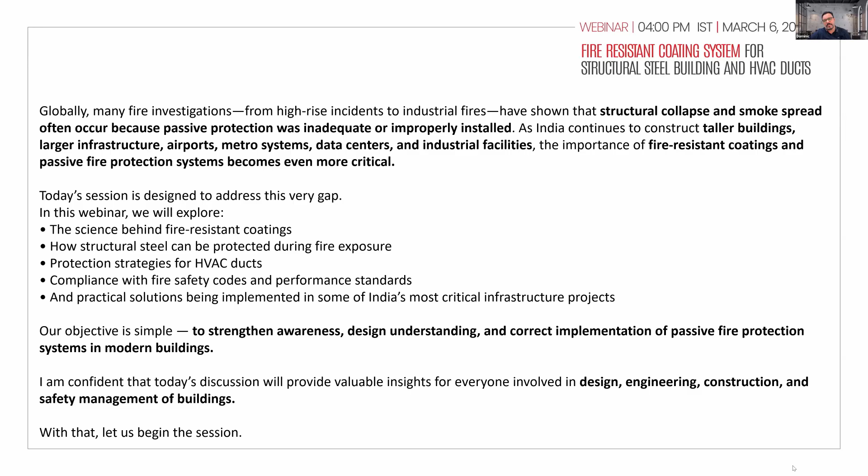And myself, Dominic - I'm founder of FSA, Fire and Security Association of India, Focus, Forum of Construction Utility Services, NFE. Today we are celebrating the 3rd year birthday of NFE, National Federation for Electrical Safety, and the one which is coming, a big moment in India, Council of Fire and Life Safety Professionals, CFLS. This is the association going to change the landscape of our safety professionals.

So I'm so proud that, being the architect of many of these associations. And as I keep saying, knowledge is not to keep forever, knowledge is to spread. Unless you give back to society, the purpose of life is wasted. So I have the young and the future.

of fire protection is Aditya Sibbal, a young man. Aditya leads an institutional partnership with Ameetuff, a brand with over 35 years of expertise. Ameetuff is well-known - I don't need to talk more about it - and they're protecting almost all the critical infrastructure. Look at the new parliament, new secretariat, prime minister's office, Supreme Court, Bangalore Airport. Name the important tunnels, metros, DMRC Delhi Metro Rail - most of these structures are all protected by Ameetuff. So I'm happy that today Ameetuff is taking up and presenting.

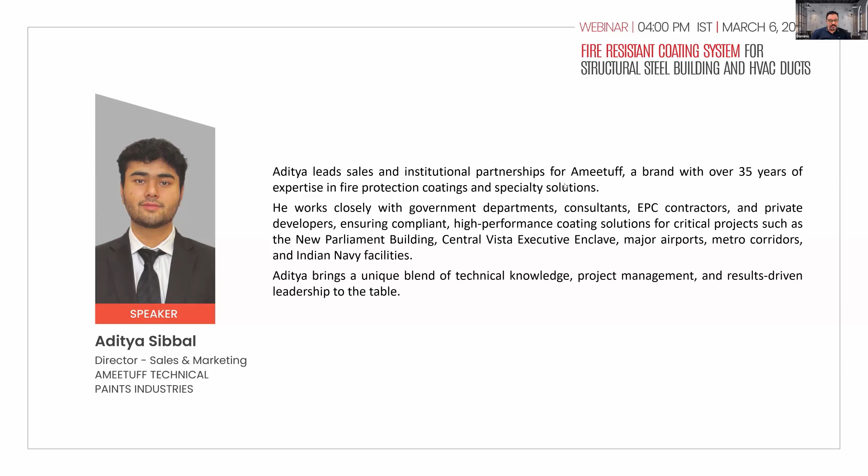Aditya Sibbal is going to do the presentation today. So I'm going to unshare this now, and I'm going to call Aditya - this is our second time doing a webinar with you, Aditya. Last time we had a very interesting conversation with people, and you are becoming a well-known face now in fire-resistant coating. I'm sure as days and months go by, Aditya is like Sachin Tendulkar in fire coating. So I welcome you, and I also welcome Senior Sibbal watching silently from behind the screen. I'm sure he will come during the question answer. Over to you, Aditya, welcome back.

Thank you so much for the kind introduction, sir. So, today's objective is really simple - it's about creating awareness about fire-resistant coatings for structural steel and HVAC ducts, because people think it's just about compliance, but it's really much more than that. I'm very recent in this field, maybe 2 years, but I've learned a lot by meeting you, by meeting various people, and also talking with my father. It's really crucial that we put the right amount of coating, the right type of coating, to the right type of surface. So for that only, we are here to present. I made a PPT for this webinar, so I'll just share that.

Okay, go ahead. Is it visible, sir? Not yet. Yeah, now it's okay, you can go full screen. Second.

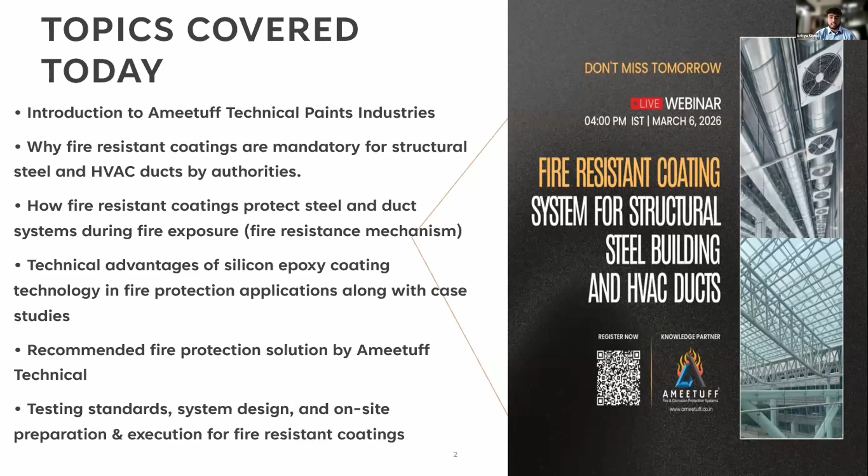The topics today will cover the introduction about the company, why fire resistant coatings are mandatory for structural steel and HVAC ducts by authorities such as NBC and NFPA, how fire resistant coatings actually work to protect steel and duct systems during exposure, the technical advantages of new types of coatings such as silicone epoxy coating in fire protection applications, along with case studies to support the claims, and the recommended fire protection solution by us that we believe is best and have successfully executed in multiple projects. Lastly, the testing standards, system design, and on-site preparations for all consultants to note down.

About Ameetuff Technical: we are a 36-year-old manufacturer of a wide range of fire resistant and fire retardant coatings for multiple substrates, including structural steel, ducts, cables, wood, fabric, other coatings, specialized dielectric, RFID shielding, marine paints, anti-fouling, and many more. That gives us deeper knowledge about the surface or application process across all sectors.

We have a dedicated R&D formulation team operating in two different centers, where we do not simply follow global formulations but engineer technologies suited for real project conditions in India, since we believe India's environment is different from foreign environments and coating durability should be higher.

We are trusted in critical infrastructure projects such as the new Parliament building, Palam Airport, Central Vista, Central Secretariat buildings, and airports like Prayagraj Airport and Guwahati Airport, all done by us.

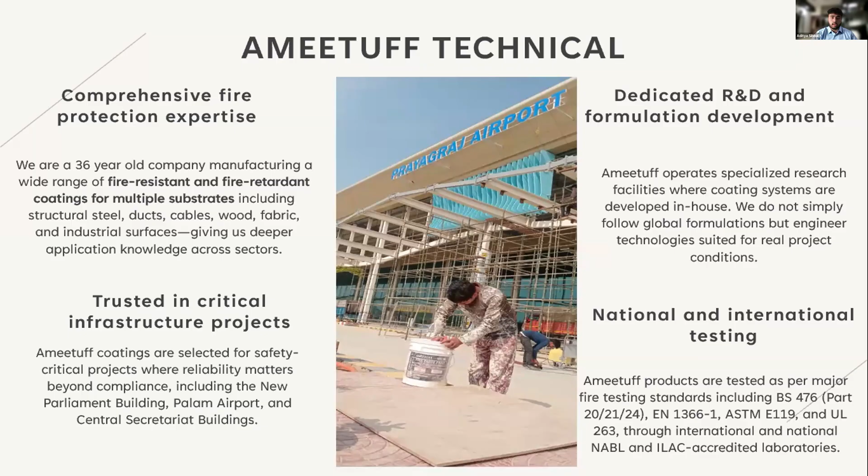Our products are tested as per major fire testing standards, including BS 476 Part 20, 21, 22, 24, and then EN 1366, ASTM E119, and UL 263, and that too from NABL and ILAC MRA accredited labs.

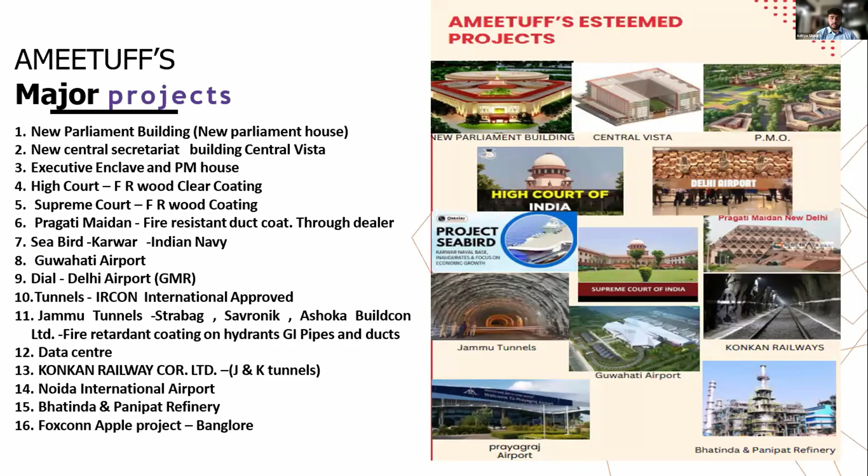These are some names of our recent projects: Seabird, High Court, Supreme Court, Konkan Railway Corporation, data centers like Amazon data center, Microsoft data center, and the Foxconn Apple project, where Apple has successfully set up their plant for iPhones, and even refineries where hydrocarbon fire scenarios can happen. We have prepared our coatings for that too.

Moving on to the subject of this webinar: why are coatings actually necessary on structural steel? Steel loses its strength at about 550 degrees Celsius, and fire temperatures, given the synthetic materials commonly used in new buildings, can reach up to 800 to 1000 degrees within minutes. So you can imagine how quickly the steel will start bending.

The coating helps maintain integrity and buys evacuation time by protecting the steel for 2 to 4 hours. During that time, safe evacuation can happen, and the rescue and emergency teams can actually help people evacuate the building.

These coatings not only protect the metal from fire but also have anti-corrosive and anti-carbonation properties. Meaning they not only protect against fire, but they also won't let the steel catch rust, and they try to prevent aging as much as possible to extend the lifespan of the steel structure.

These coatings also comply with codes made mandatory by NFPA, BIS, and NBC. They minimize property loss by preserving structural integrity, protect valuable assets, reduce damage, and most importantly save lives. In terms of cost-effective risk management, fire coatings are a small investment compared to the potential cost of rebuilding or loss of life.

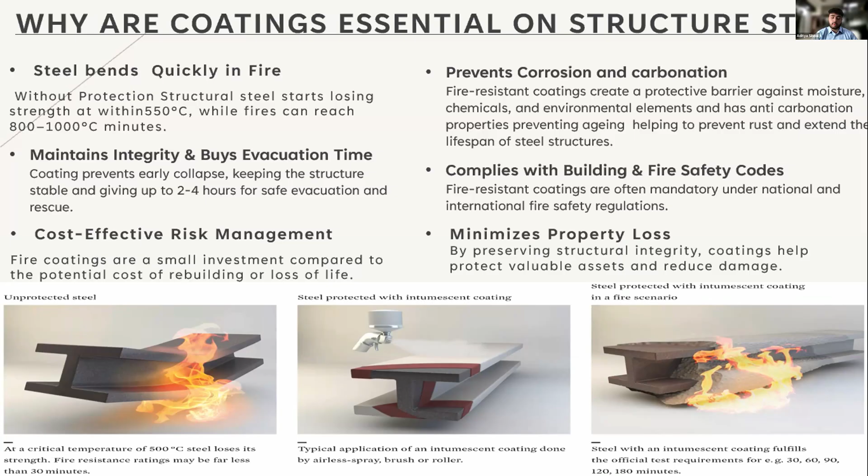That really means something, because people try to get away with it, but when the building actually catches fire, it's a huge mess. Here I have attached an image showing the bending of steel and the protection of intumescent coating, and how the coating expands and protects the metal. I'll dig deeper into that toward the end.

We'll now move to the essential reasons to apply fire-resistant coating on ducts as well, since we're talking about HVAC ducts too. The first reason is to prevent fire spread through ductwork, because ductwork can unintentionally act as a pathway for fire to spread, rapidly spreading heat and flames. Fire-resistant coatings create a protective barrier that slows or stops this spread.

So that people can see the fire exit or actually ask for help, the coatings preserve the structural integrity of the ducts under extreme heat. The ducts may warp, melt, or collapse. They can block the fire exit or hurt somebody. Fire coating insulates the duct surface and maintains the shape and function.

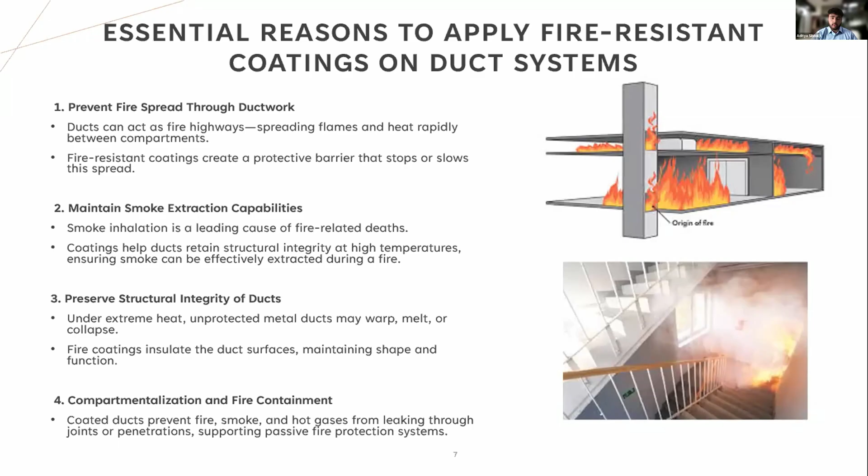Compartmentalization and containment is really important. Coated ducts prevent fire, smoke, and hot gases from leaking through joints or penetrations, supporting passive fire protection, meaning if a fire happens in one room, it won't let the fire carry on to the next one. Here's an image: a coated and insulated steel duct working properly, extracting smoke, and the fire is not spreading out of that room.

Fifth, it also provides critical time for evacuation and firefighting by delaying the fire spread. Coatings buy valuable time, and they also protect vital systems in sensitive zones such as hospitals and data center control rooms. Maintaining ventilation and preventing fire ingress through ducts is crucial.

They also comply with fire safety regulations, same as structural steel. Coating ducts is mandatory under building fire codes such as NFPA, NBC, and IBC, and they also help ensure building-wide fire safety certification and insurance coverage.

Lastly, these coatings come with a fire sealant to seal gaps, cracks, or joints. Many fires exploit small vulnerabilities, and coatings seal these weak points, adding a continuous fire-resistant layer.

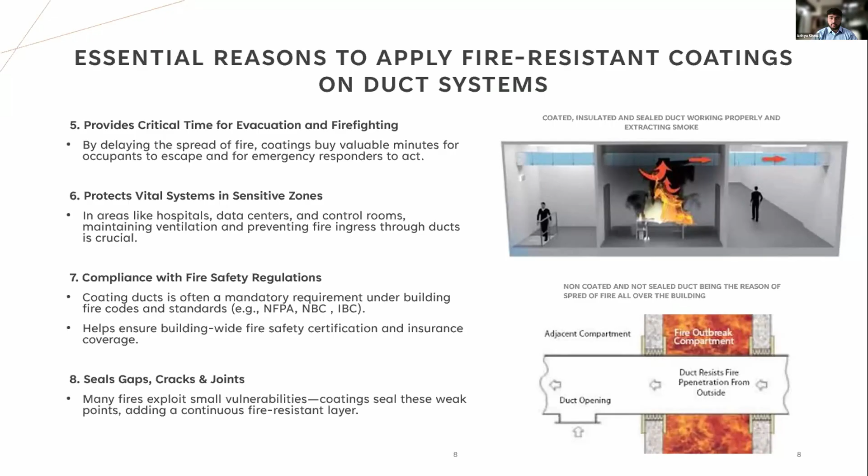Moving on, we'll come to the types of coating available in the market: intumescent coating, ablative coating, and vermiculite coating. I'll discuss how their mechanisms work.

In an intumescent coating, a fire intumescent coating expands under high heat to form an insulating barrier that slows and prevents flame spread and creates an insulating char. That intumescent expands up to 50 times the original size, but sometimes maybe even 70.

Then we come to an ablative coating. This ablative coating doesn't swell like intumescent. It protects the surface by slowly charring and eroding under high heat, absorbing thermal energy and preventing flame spread. It is commonly used in fire barrier ducts and aerospace applications for heat resistance and safety.

Lastly, we come to vermiculite coating, a fire resistant material that insulates and seals steel and concrete against high temperature. While effective, it requires a thicker application and may affect aesthetics and add a lot of dead load due to its high DFT.

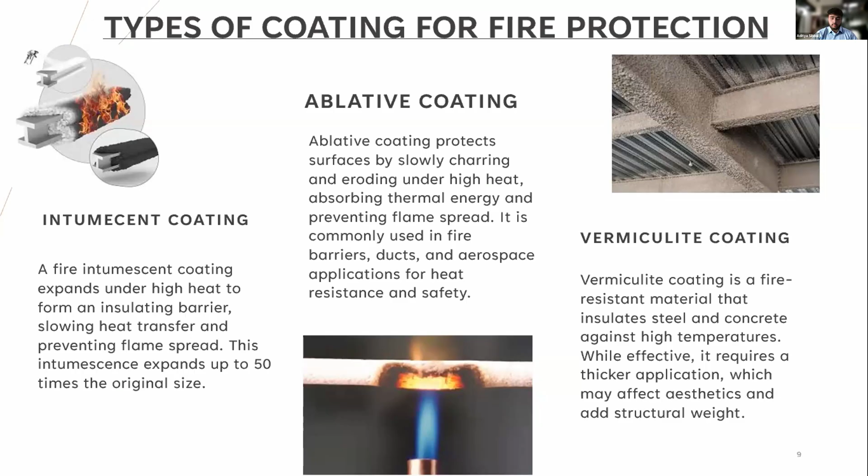For further explanation, I've done a technical comparison for all these types of coatings. Fire performance in a test furnace does not automatically translate into reliable performance on site over decades of service life. Real world exposure conditions, application variability, and material behavior can change. The following are the technical factors that critically test the reliability and long term effectiveness of the fire protection system.

Here's the list, and I'll cover some very quickly: anti-corrosive protection, char stability. We'll dig deeper into this.

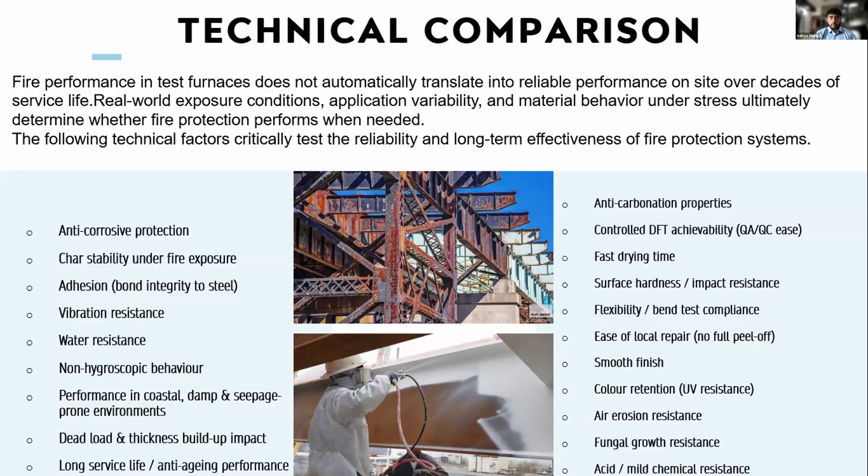Firstly, char stability under fire exposure. As I said, intumescent coatings have a tendency to expand up to 50 to 70 times more. So if the char falls off under fire exposure, the steel is exposed to fire, and steel is conductive in nature. So even if you lose a patch of that char, it will conduct heat through the whole framework.

And the point of doing that coating will fail. Here I have made a comparison with the nature of the fire barrier and char cohesion at 900 to 1050 degrees.

I have attached a case study as well, where it is found that fire resistant coatings with certain different types of fillers can improve char formation and thermal stability during fire. With the char, they are reducing heat release and maintaining lower backside temperature under prolonged use, where we notice the silicon epoxy system has a reinforced stable char.

As we know, ceramic reinforced stable char means it will stick to the surface no matter what. Water base also has an organic intumescent char. Vermiculite is just a thick coating and does not require a char; it is an inherent mineral layer. Char cohesion remains high. Water base has been tested to show it can be moderate or prone to cracking and shrinking, and vermiculite, same, no char.

Then resistance to flame erosion - sometimes the fire develops a certain PSI, so the char should be able to handle that too.

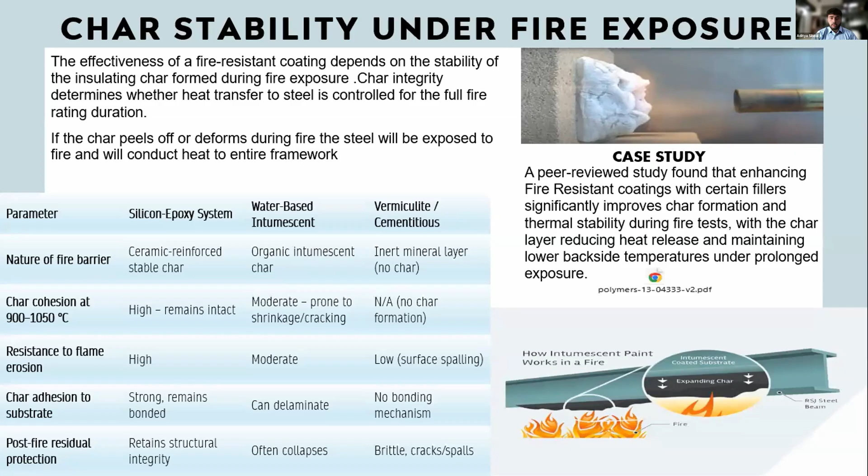Moving on to the bigger point, that is corrosion under fireproofing. This is a real concern in our fire safety world, actually, and also in India, since we forget that the coating is done, and that can have a disadvantage as well, that you won't be able to see the corrosion happening under it. So to declare that, I have attached a case study as well in an offshore unit.

A field study on an offshore unit documented corrosion beneath passive fire protection caused by moisture ingress through cracks in fireproofing, corroding steel anchors, mesh behind layers. The damage progressed hidden, leading to loss of adhesion, cracking, and local detachment of fireproofing, exposing steel members. This directly compromised the integrity of fire barriers and the mechanical stability of the protected structural elements.

Here I've made a comparison as well. Silicon epoxy is inherently anti-corrosive in nature due to silicon versus epoxy. Water-based systems are primer dependent and don't have an inherent anti-corrosive property, where vermiculite is a porous cementitious layer, so it does not offer any anti-corrosive properties.

And the barrier against moisture and oxygen: silicon epoxy almost creates a plastic-like layer which is dense and cannot be penetrated, while water-based systems are totally dependent on the primer and are hygroscopic in nature, so they attract water, and vermiculite as well. They are hygroscopic in nature and they allow water to enter.

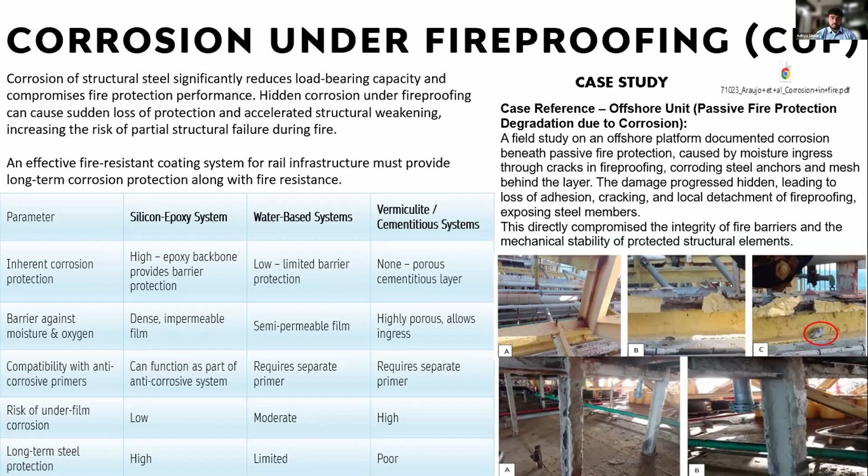Moving on, the next point would be the bond integrity during a fire. As I said earlier, bond integrity during and before fire is really crucial. If the bond is not there, the coating won't perform and will leave a patch of steel exposed to fire that can conduct it to the whole framework.

I've attached a case study on adhesion behavior between intumescent coating and steel substrates. It shows that effective bonding mechanism depends on wetting ability, surface tension, and mechanical interlocking, factors that directly affect post-fire adhesion strength.

Here I have listed a few standards which are tested by us in silicon epoxy, water-based, and vermiculite, where we observed that according to ASTM E736, a bond strength test for fireproofing, silicon epoxy passes with the long-term adhesion retained, while water-based also passes with the adhesion degrading over time, and vermiculite also passes that test, but only in the laboratory.

Moving on, we'll go with the ASTM D2794 impact resistance test, where silicon epoxy had no delamination upon impact, while water-based has local chipping and delamination, and vermiculite coating fails that test on impact.

ASTM E760, that is bond adhesion performance: silicon epoxy passes with long life adhesion. Water-based also passes that test, and the vermiculite complies only in the lab.

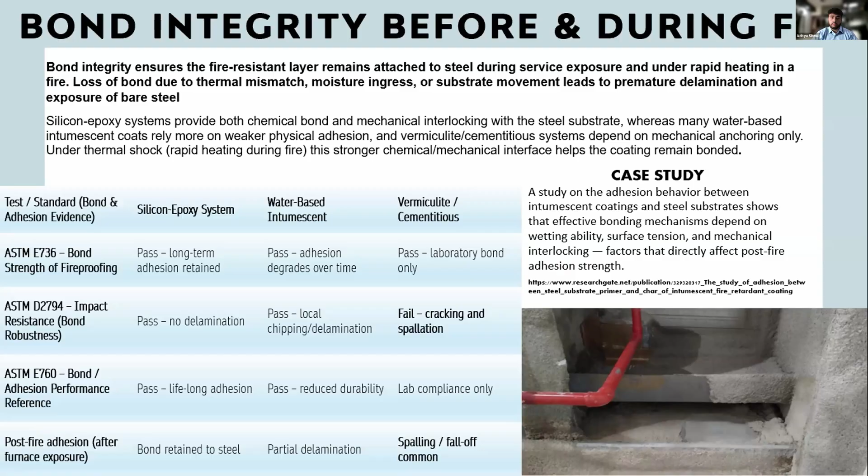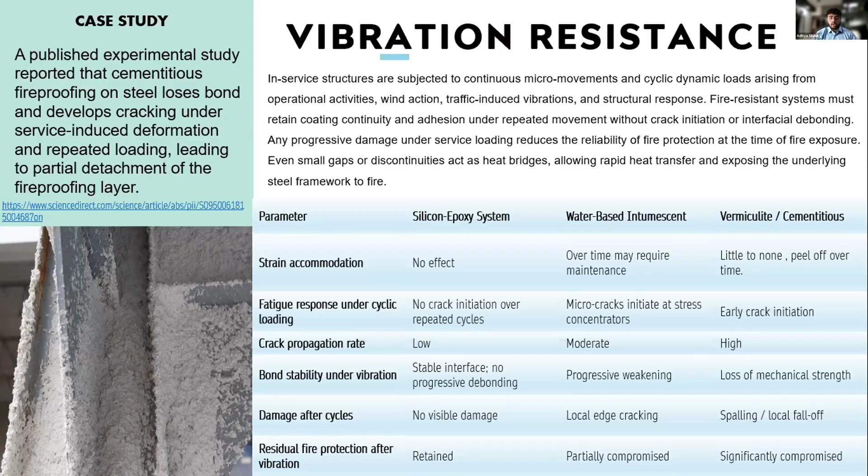Water resistance is also a really crucial factor when you are going for fireproofing on a steel substrate, where test standards are made according to ASTM B117. That's a salt spray test where corrosion or moisture exposure is studied. Silicon epoxy passes that test. Water-based also passes that test, but vermiculite coating fails that test due to moisture ingress and its porous nature, allowing the water to enter.

And then ASTM D2247, humidity resistance, important for application in coastal areas. The silicon epoxy system passes with no problem, water-based intumescent coating passes with softening or blistering over cycles, and the vermiculite coating fails. Then ASTM D870, water immersion, where you dip the sample in the water, and silicon epoxy had no effect. It passes the test. Water-based fails that test, as well as vermiculite.

And ASTM D570, water absorption. Silicon epoxy did not absorb any water, negligible, and water-based did fail that test, as well as vermiculite. Then ISO 11130, water resistance. Silicon epoxy passes the test. Water-based also passed this test, but vermiculite fails this test due to its porous matrix.

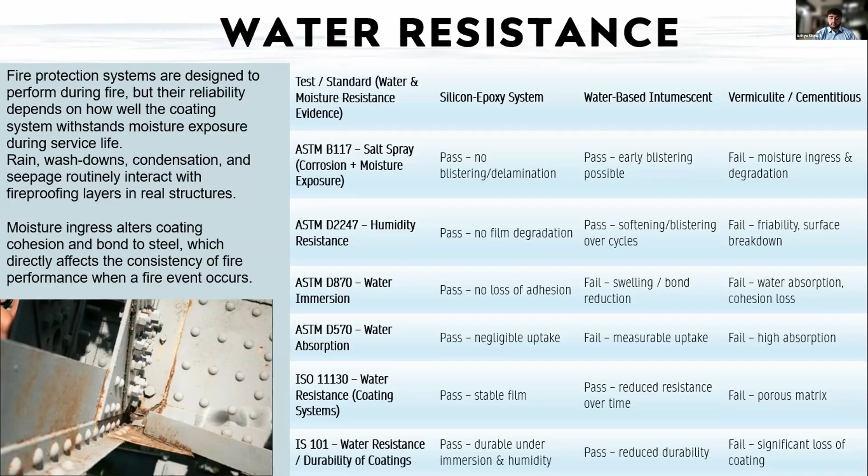Coming on to a very crucial factor: hygroscopic behavior. We have attached two case studies to prove how vermiculite coatings are hygroscopic in nature, meaning they attract water, which is really bad for steel as it will invite corrosion. Vermiculite is a hydrous porous mineral, so it naturally absorbs water and holds moisture within its structure. When vermiculite is mixed with cement to form fireproofing, the resulting coating becomes a moisture-absorbing matrix by material design, not by application defect.

This porous microstructure allows water to enter and remain within the fireproofing layer rather than shedding it. Retained moisture stays in contact with the steel, increasing the risk of hidden corrosion and gradual loss of fire protection integrity over time. As you can see in the attached image, vermiculite coatings are thick, so you don't see the corrosion happening under them. Then when it peels off, or you peel it off through external damage, you can see the corrosion.

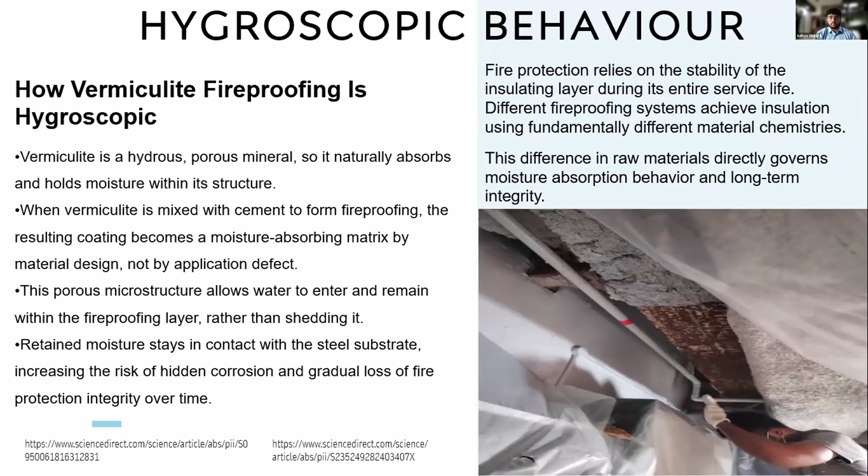In the same way, the performance in coastal, damp, and seepage-prone areas: everyone must be aware of what type of coatings they should be using at different types of location. If you are using coatings in coastal, damp, or seepage-prone areas, you should always go with an epoxy system, which is the silicone epoxy system. Water-based paints or vermiculite won't sustain in that environment. As seen on the left in the images, I have attached the same case study as before for the offshore unit to show the water-based coatings peeling off and exposing the steel to fire.

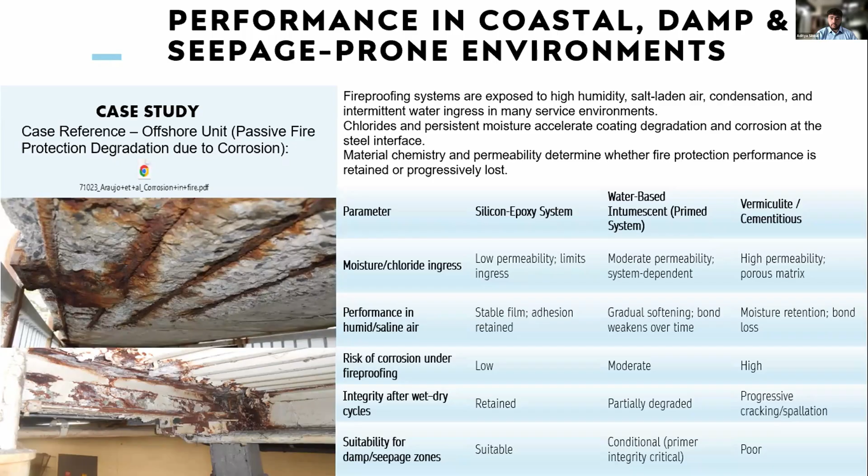Then the dead load and DFT difference. This factor is also overlooked many times. Basically, of the three types of coating, the silicone epoxy requires an average DFT of 1500 microns, considering we want a protection of 2 hours on a 6 mm plate. On the same hand, water-based coating will require a 2 mm thick coating to protect a 6 mm plate for 2 hours.

But vermiculite coating will need 25,000 microns, that is 25 mm, for a 6 mm plate for 2 hours of fire protection. This is a concerning factor because this is not just an increase in application process or application time, but it also adds a significant amount of dead load. So I've attached a case study where research confirms that increasing fireproofing thickness reduces heat transfer to steel and extends the time taken for members to reach critical temperatures during fire exposure.

However, the thicker fireproofing systems inherently add more permanent mass to steel elements, which must be accounted for as a dead load in structural design. This additional mass influences member sizing, connection designs, and load combinations, particularly in long span structures. Therefore, fireproofing thickness selection affects not only fire performance but also structural response and design margin.

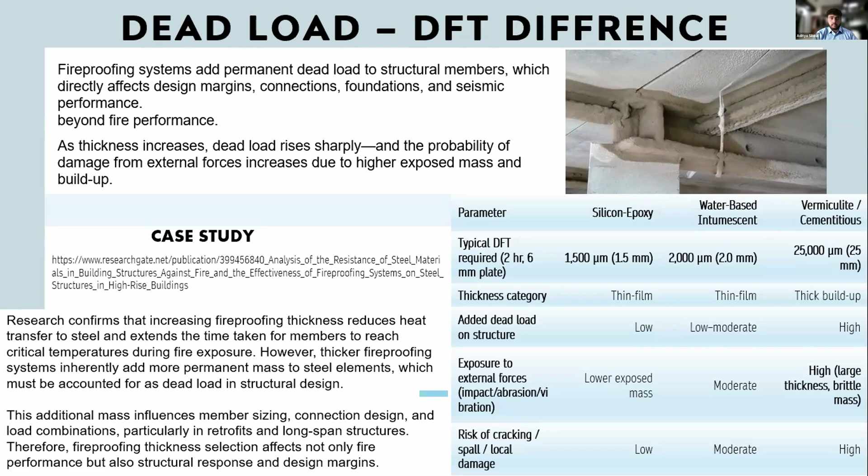There are some other factors as well, where controlled DFT is achievable, that is quality check ease. So silicon epoxy can be checked easily with an Elcometer, same as water-based, but vermiculite coatings are so thick, they have to be checked differently. Silicon epoxy offers fast drying time, improving the application time taken and helping the project get completed sooner. And for water-based coatings, drying varies with the humidity and site conditions.

Cement coatings are usually difficult to apply, take time, and are quite messy. Surface hardness and impact resistance as per IS 101, ASTM D3363, ASTM D2794. So we have done the test, we have passed the test with silicon epoxy, we have passed the test with water-based system, but we had failed with the vermiculite system. Since we are a manufacturing company, we manufacture all types of coating and have got it tested from various labs to come out with this result.

And moving on, we'll go to the flexibility and bend test compliance, which follows the standard of ISO 1519, B571, and IS 101. So we noticed the silicon epoxy system accommodates steel movements without cracking, and water-based also accommodates limited strain, cracks under high force, but vermiculite coatings do not pass the bend test at all.

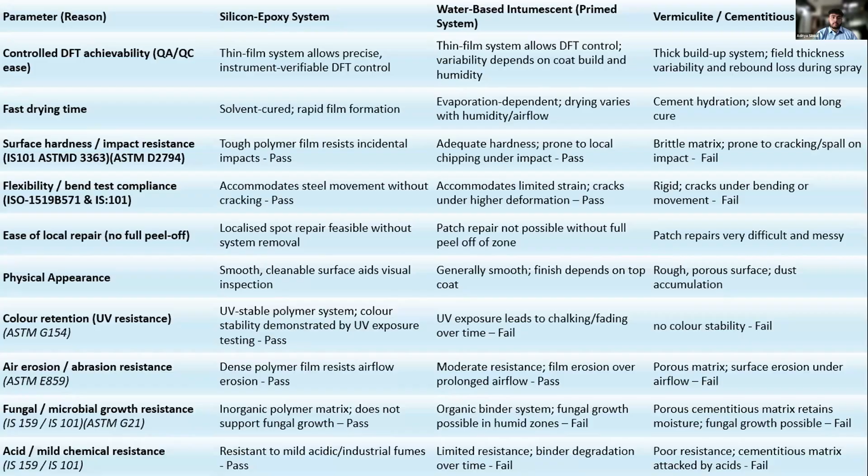So that's the technical comparison between all types of coating available in the market. What we believe is the best is silicone epoxy, then water-based, then vermiculite. Vermiculite is a sort of obsolete technology, as it's been running from the British times. Now we have developed new solutions, new formulations, thinner coatings. So we believe that these should be adopted and have started creating more awareness about it for people to go for better solutions.

So at Ameetuff, the recommended system for ducts, what we suggest is firstly, of course, the surface preparation. Prior to any coating application, the surface must be thoroughly clean, and we also offer the 3-in-1 chemical.

This ensures optimal gripping of the coating to the duct surface. Then we go on to the base coat. When the surface is free from rust, dust, or any other contaminants, and the primer has fully dried, we apply our ARC-265(SE), a silicone epoxy based coating. This coating offers excellent adhesion, fire resistance, and provides anti-corrosion and antifungal properties for long-lasting durability.

Then over that, we apply a water-based coat, ARC265WB, a water-based top coat to ensure compliance with the VOC regulations while enhancing the cost efficiency of the overall coating system. Since cost is a very big factor in India, we aim to provide the best fire protection solution at the best cost as well. All our coatings are very economical. It's not that the silicone epoxy coating is much more expensive than the other two. They all fall into a similar price range.

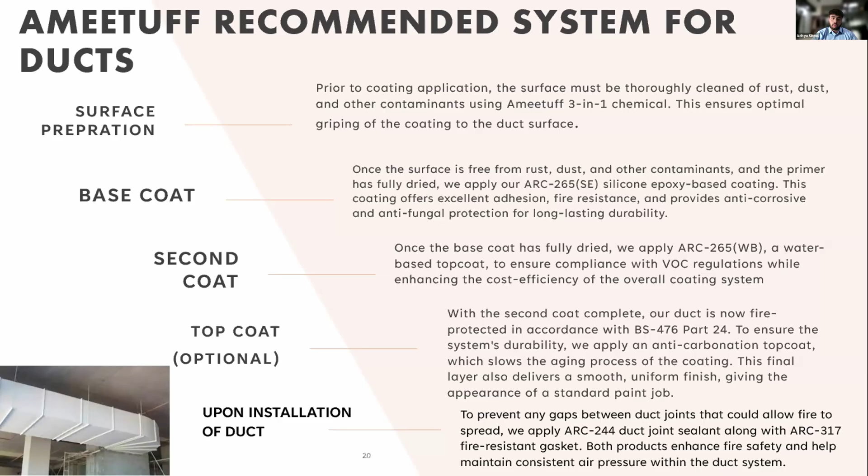And we have a similar system for structural steel as well. After surface preparation, the primer layer of silicone epoxy primer: once the surface is rust, dust, and oil free, Ameetuff recommends a thin primer coat of ARC250PR, a silicone epoxy fire resistant zinc phosphate primer that provides anti-corrosive properties, prevents surface damage, and ensures high compatibility with fire resistant top coats.

Moving on, we'll go with an intermediate coat. Once the primer is fully dry, we apply multiple coats of our main protection, the silicone epoxy fire resistant ceramic coating, ARC254. This coating covers almost 3/4 of the total DFT system. Top coat, a water-based plain finish again for the VOC norms and green building compliance. After the ARC254 fully cures, we apply ARC253PP, a water-based fire-resistant top coat for a smooth uniform finish and added protection. An optional second top coat can be the same anti-carbonation coating to prevent aging and fungal formation.

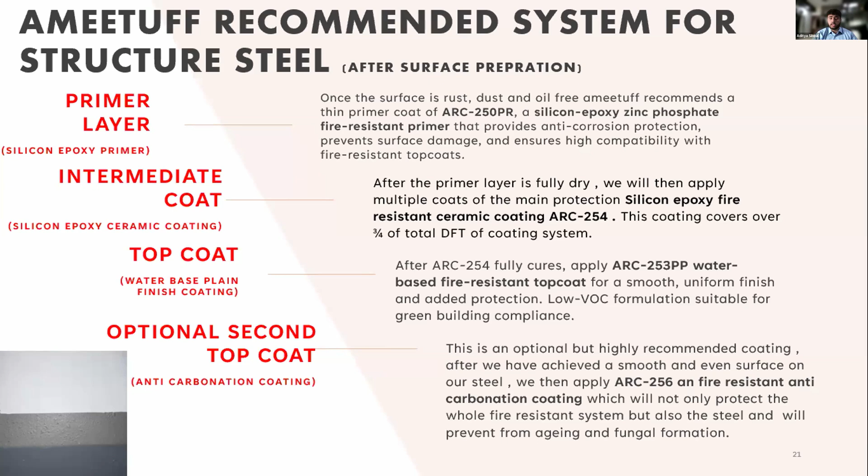Whenever you are going out to buy a fire-resistant coating for any type of project, you must know about certifications and their importance in the market. That's why at Ameetuff we have gotten our products tested from the Government of India lab, National Test House, the State Government lab from Haryana, CBRI Roorkee, the best lab in India for fire testing, and multiple NABL accredited labs. And we have our products tested internationally at Efectis International Lab and many other world-class labs such as Spectro, Byte, for which I have attached the test reports for your reference.

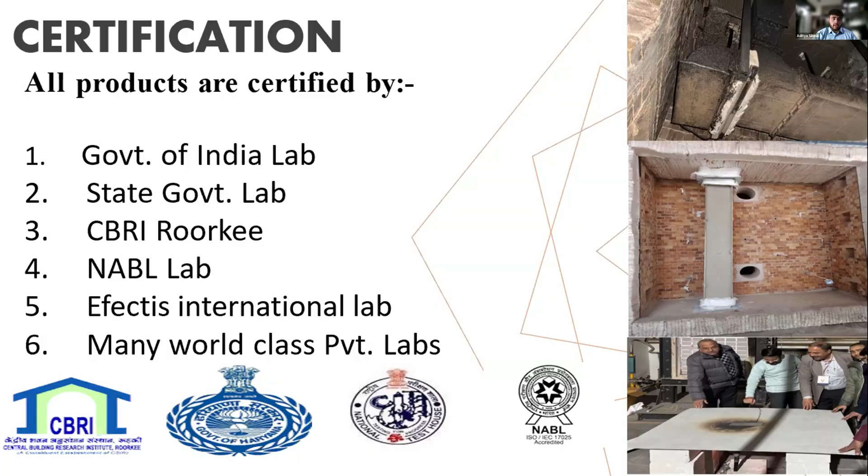We have the test certification for silicone epoxy via National Test House. We have certification for our recommended system, ARC 254 as a base coat and water-based as a top coat, for 3 hours from Spectro Lab, which is an NABL accredited lab. Then we have a test certificate for a load bearing structure for 3 hours with the same solution of 254, 253 and an anti-carbonation coating.

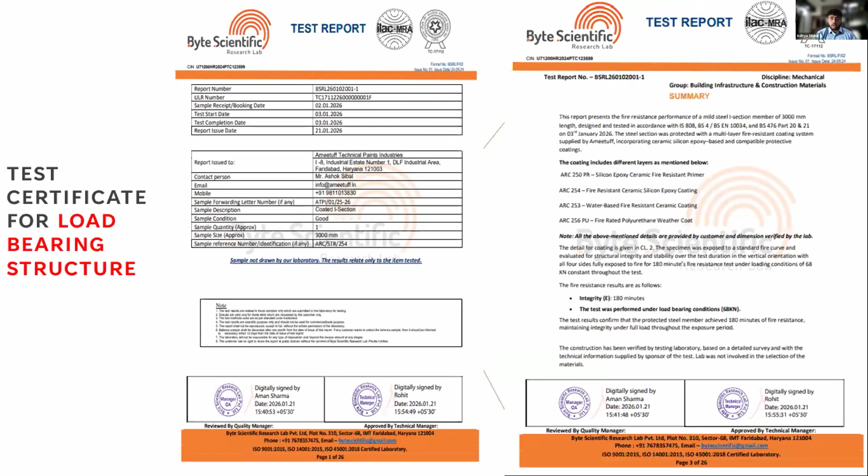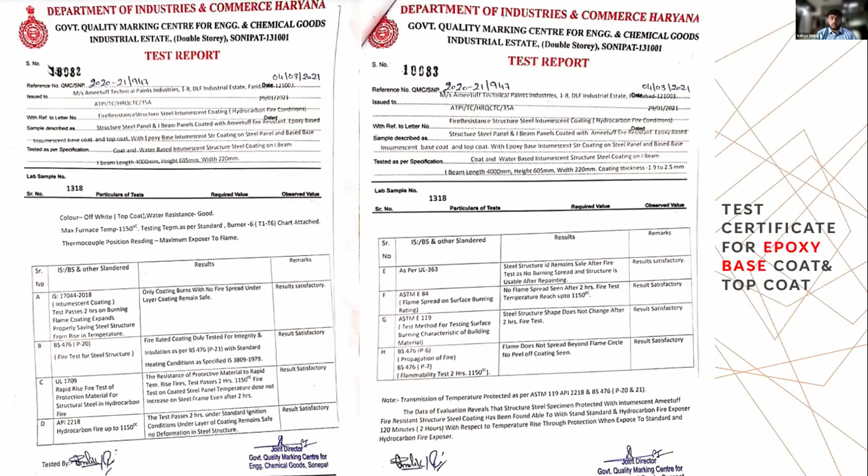That lab is accredited by ILAC MRA, an international accrediting body, and NABL as well. This is a test report from the Haryana State Government Lab for silicone epoxy as base coat and top coat. We have a certification as well from CBRI Roorkee.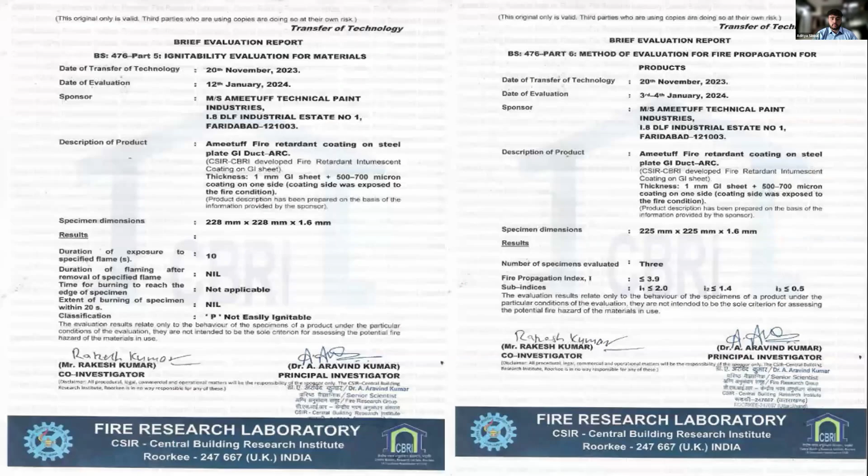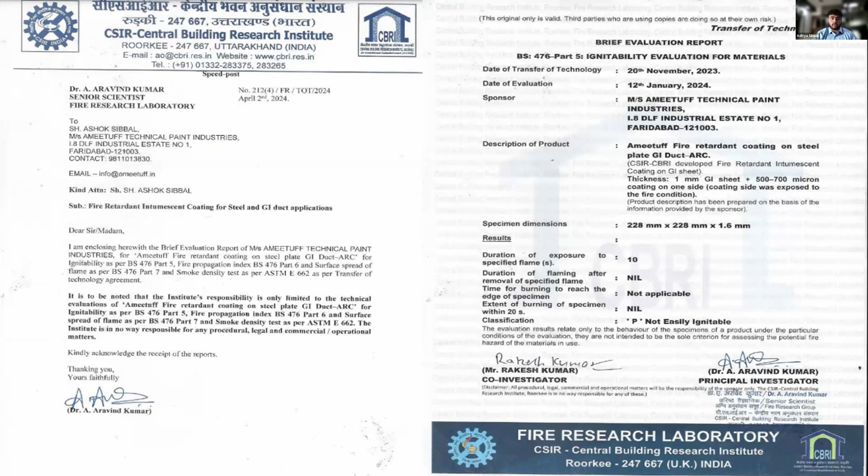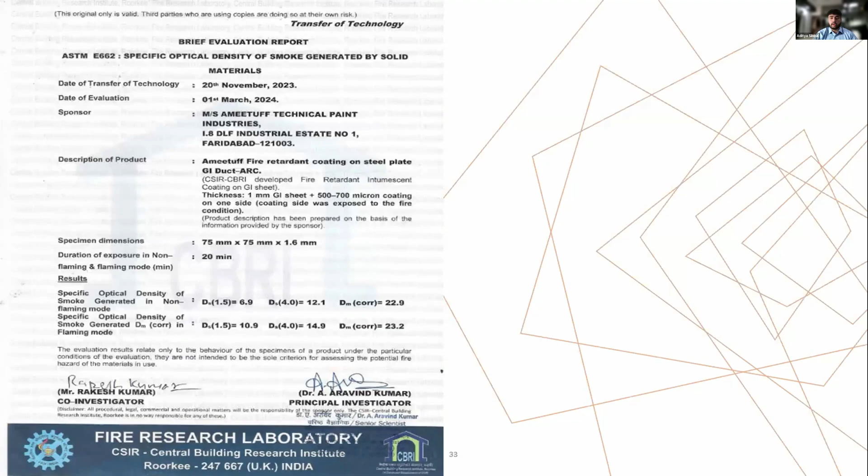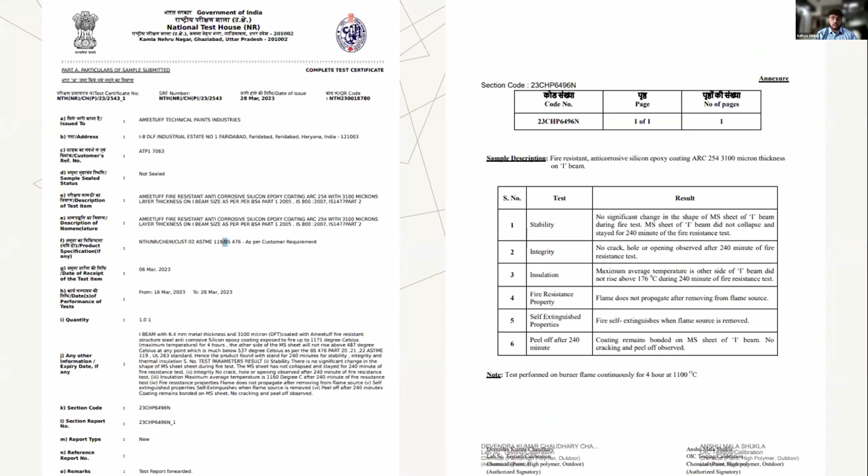Multiple test reports are done according to multiple standards for compliance at various projects. Then we have a test report from National as well for 4 hours, and a test report for 2 hours.

Second stage would be the coating application and thickness control. The application of compatible anti-corrosive primer and fire-resistant coating system should be there. Uniform coating application using brush, roller, spray depending on site condition, and monitoring and verification of dry film thickness, DFT, to achieve the specified fire rating. I've attached an image of an Elcometer on the right side. This is how you check the DFT of a coating. Here, as you can see, it's checking the coating and it's coming at 170 microns. On steel, we say the thickness should be above 1500 microns if it's a 6 mm plate, or in ducts we recommend 700 to 900 microns.

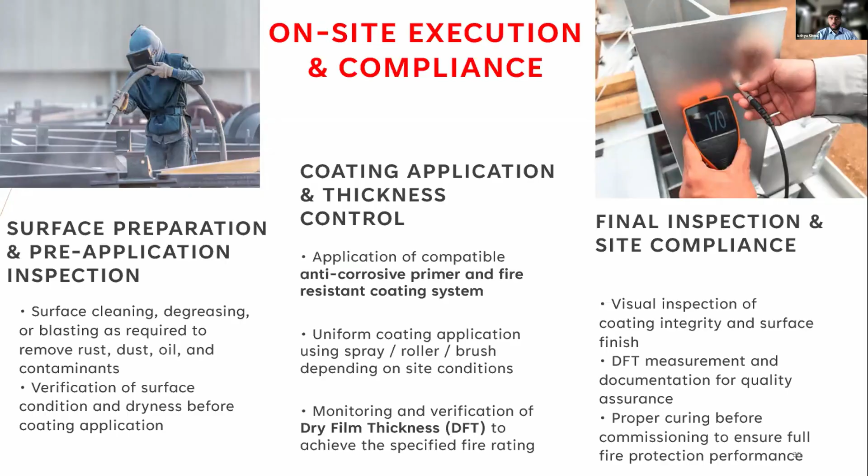I think that's it from my side regarding the fire resistant coating for structural steel and HVAC ducts. I hope everyone got a bit of an idea of what I was trying to convey.

So, what coating do you carry out on ducting? Two, do you have test evidence on BS 476 Part 24 with respect to coating? Three, what is the testing temperature? Four, details of stability, integrity, insulation.

I'll answer these one by one. So what coating do you carry out on ducting? As I said, we carry out multiple coating systems, one being silicone epoxy, the second being a water-based coating. Do you have test evidence on BS476 Part 24? Yes, as I showed you the test reports earlier. What is the testing temperature? We test above 1100 degrees Celsius. For ducts with insulation, we go for 1100 degrees Celsius, and without insulation, we go for 300 degrees Celsius, as that's the smoke temperature, and we have to make sure the smoke does not melt the ducts. For details of stability, integrity, and insulation criteria based on the test results, that is mentioned in the test reports, which you can ask for on our mail.